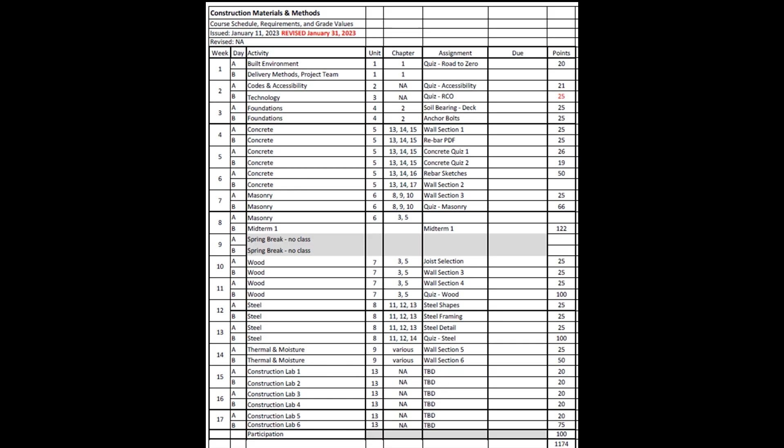To make sure that students can complete this exercise safely, we have them take a co-requisite, which is our OSHA 30-hour construction safety course. They take this during our A term, which is the first 8 weeks of the semester, and then we schedule our materials and methods lab experiment so that they do that during the second half of the semester. The textbook for this course, by the way, is Fundamentals of Building Construction by Edward Allen and Joseph Iano.

The first day that I take students to the construction lab, I have them complete an individual exercise where they can get familiar with the lab layout, where the safety equipment is, where the PPE stuff is, and get familiar with some of the equipment and tools.

The exercise I have them do is to create a little frame made out of scrap 2x4 material. They can make it any size they want, though I encourage them to make it somewhere between 12 and 16 inches, and a square. We have to explain what a square is versus a rectangle sometimes, but that's okay.

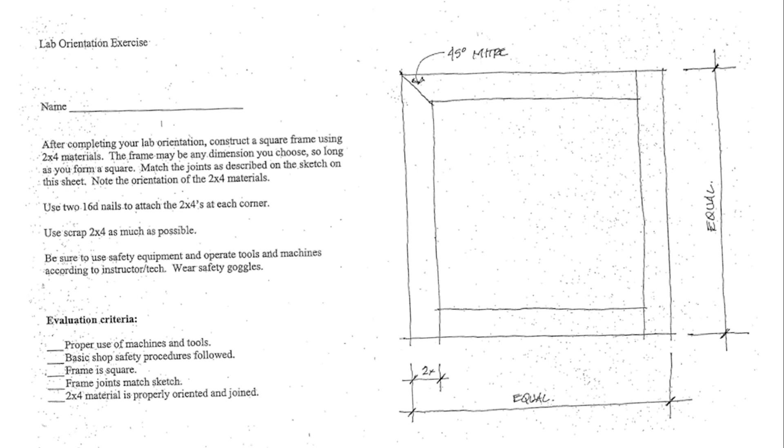Notice that each of the four pieces, or sides of the square, are cut differently, so none of them match each other. They have to figure that out.

They also have to put this thing together in its vertical orientation, so they're looking down at the frame and seeing the 1.5 inch, or 2x, dimension of the lumber. So the frame is deep rather than shallow. Note that there's a mitered corner on it, which the students really hate.

Each joint is put together with two 16-penny nails that they have to drive by hand. This allows me to see their skill level, how they interact with the equipment, and their degree of patience.

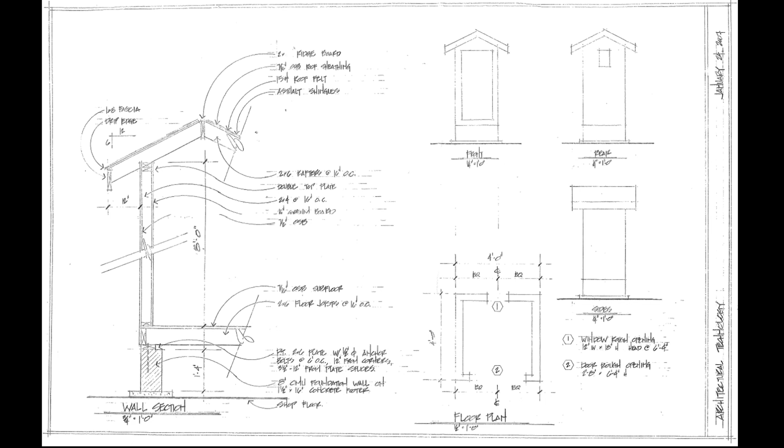Using this information, I will put them on teams for the rest of the semester to complete the bigger lab experiment. For this part, we have teams of anywhere from 2 to 4 students work together to complete this house, which we build inside our construction lab.

We use full-size materials. It's basically a 4-foot by 4-foot by 12-foot high structure.

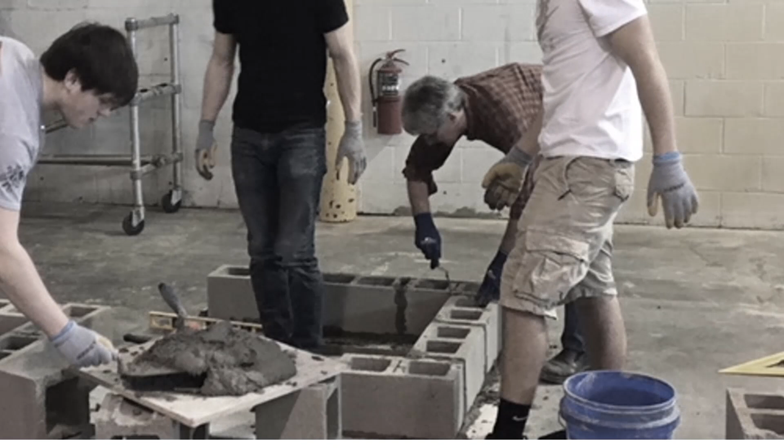We start by placing a footing on top of our concrete floor. It's 1.5 inches thick and 16 inches wide, that way we can pretty easily demolish it. That's followed by 2 courses of CMU foundation wall.

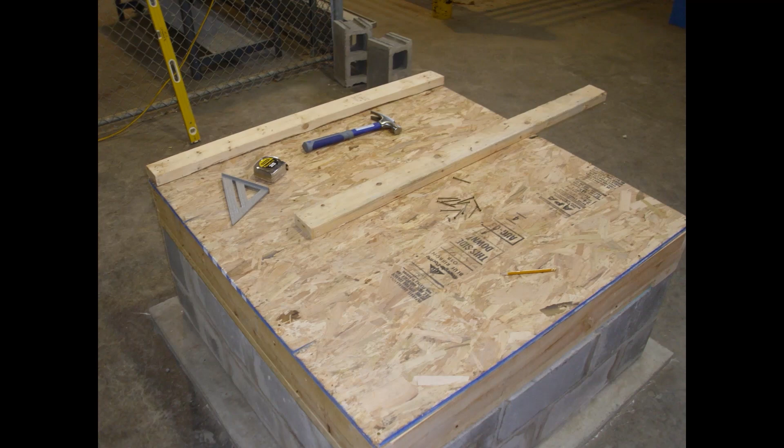We install anchor bolts, a pressure-treated sill plate, sill sealer, and a 2x6 floor system with OSB subfloor.

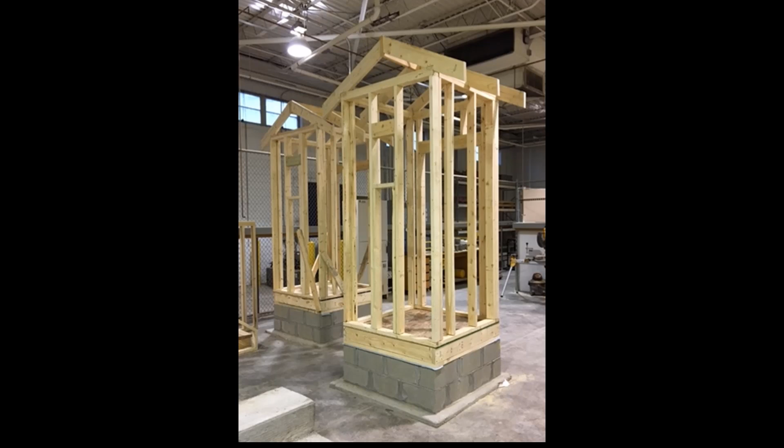Our walls are framed with 2x4 lumber. We have a sole plate, a double top plate, and studs at 16 inches on center. The front wall includes a framed door opening, and the back wall includes a window opening.

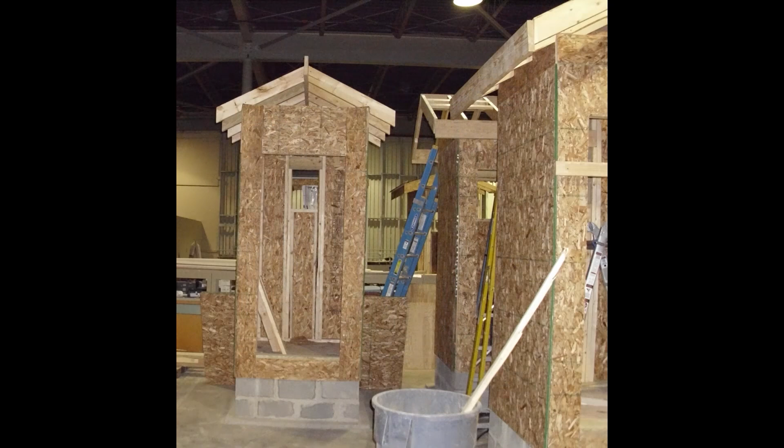Our roof structure consists of 2x6 rafters that are hand cut using a framing square. We sheet the roof and the walls with 7/16 inch OSB.

Our final day at the construction lab includes demolition, which we can usually get done in less than 2 hours. We recycle as much as we possibly can. We discard the concrete and the CMU most times, though occasionally we can save some, but usually we throw that away.

We have a second version of this structure that has slightly lower wall dimensions, so we can recycle all of our studs and plates and things like that.